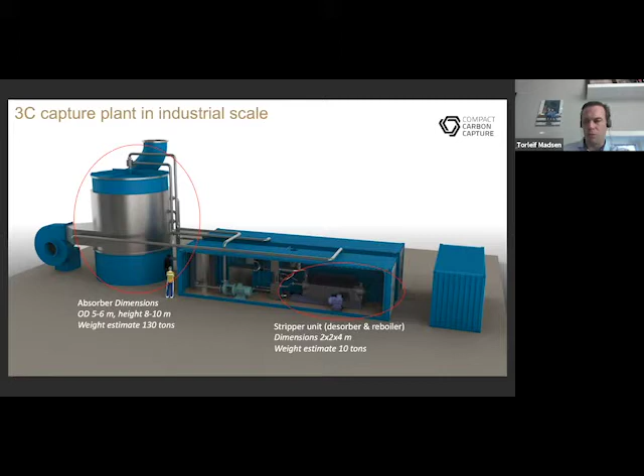The loaded solvent is taken into the stripping unit where it's heated up and releases the CO2. So you can deliver the CO2 at an overpressure of about 4 bar, which will be energy saving in the liquefaction.

We are standardizing this in modules. So instead of tailor-making CO2 capture plants for each point of emission, we are standardizing in strategic sizes, and then we are scaling by modules. We could have as little as 10,000 tons per year, which would be suitable for very small emissions and preferably utilization cases for the CO2, up to medium points of emission in the roundabouts of 1 million tons per year, which would be huge waste energy plants or large industrial sites.

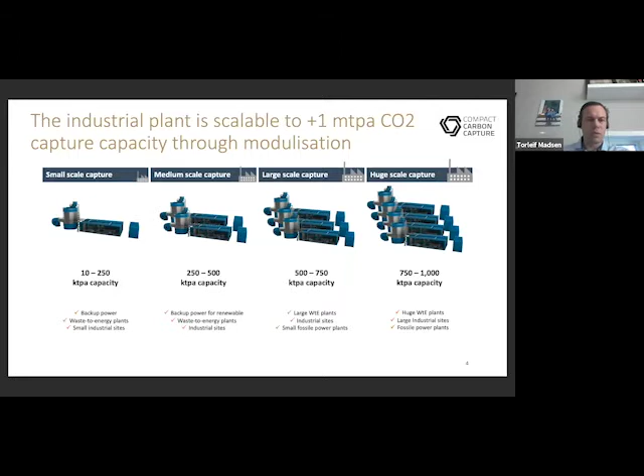So our key feature is of course the size. With a 90% reduction on the core components, we find that we could reduce the size of the plant by up to 75%. This allows us to use a lot less building materials to build these plants, and that has a direct effect on the capex. So we're aiming for a 50% capex reduction, which will of course be case specific.

By adding this module-based scalability to the equation, we find several benefits. One is that you do not have to invest in a full capacity of your production right away, but you could deploy one module and then build up a price premium for emission-free products, and then add on modules as the market moves in the right direction in terms of payability for CO2-free products.

In terms of OPEX, the process technology itself is quite equal to conventional technology, but because of the high G forces we are using to distribute the solvents, we could utilize a lot more viscous solvents, giving us the opportunity to have more efficient solvents and a much higher degree of freedom on which solvent to choose. So we could use the optimal solvent for each point of emission.

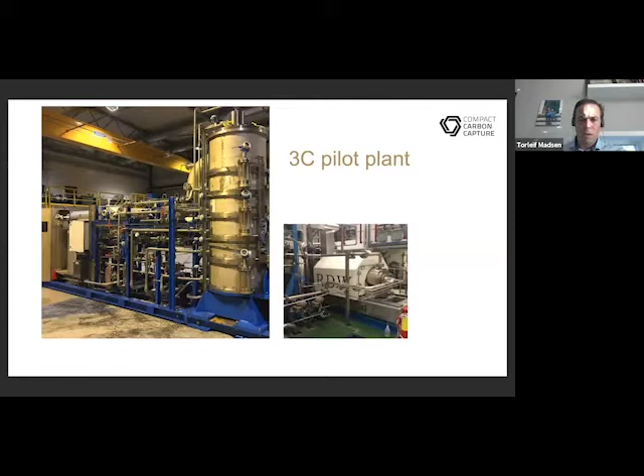If you swap the slide again, I think that would be conclusive for my presentation, and I would be glad to answer a few questions at the end if the time allows for it.

Okay, I don't think we've got any questions coming in. A question from me would be, what type of customer are you looking for this kind of product? Is it the industrial sector? I mean, you've talked about maritime, but is this aimed at the industrial sector?

It's industrial, waste energy, power plants. I think it's a matter of where we find it competitive. And if we look at 5 million tons or 10 million tons coal-fired power plants, I think the capex issue would be less significant in the overall cost perspective. But everything in between 10 and 700,000 tons per year in emission, I think we find the sweet spot. So the competitiveness of our technology would increase as the need for footprint is higher. So if you have a lack of space to put your plant, I think we would have a large favor.

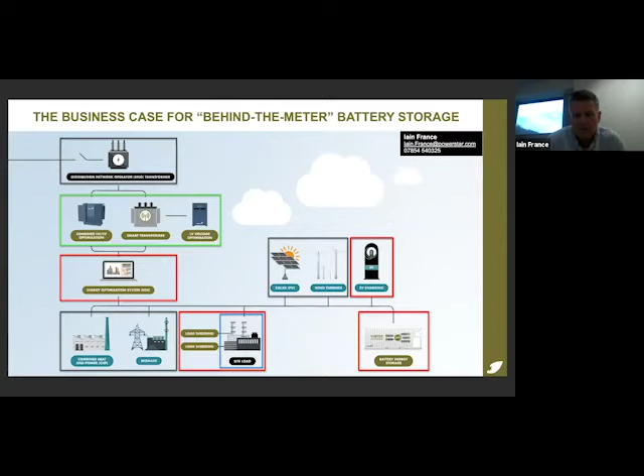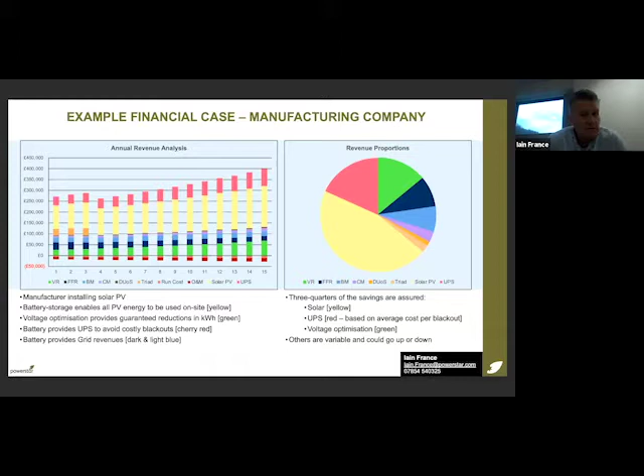I think I just did that in 20 seconds under my 7 minutes. How's that, Scott? There you go.

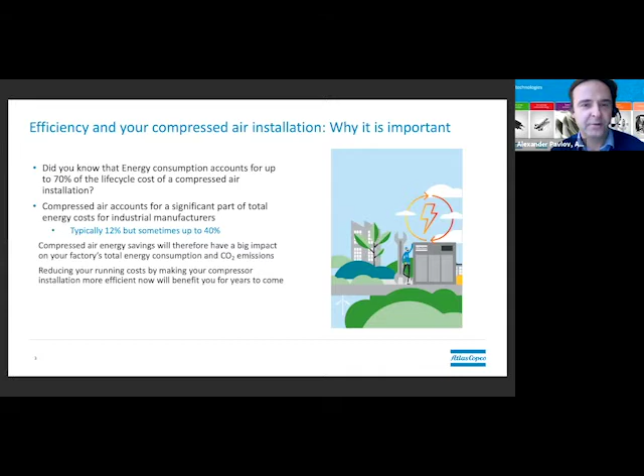What I really want to speak about today is the importance of the energy aspect when we speak about compressed air. Normally it's about 12% of the total industrial consumption for electricity. Compressors are used in all industries, so in any factory you would find a compressed air system, and they are big consumers of energy. So the focus has to be always there.

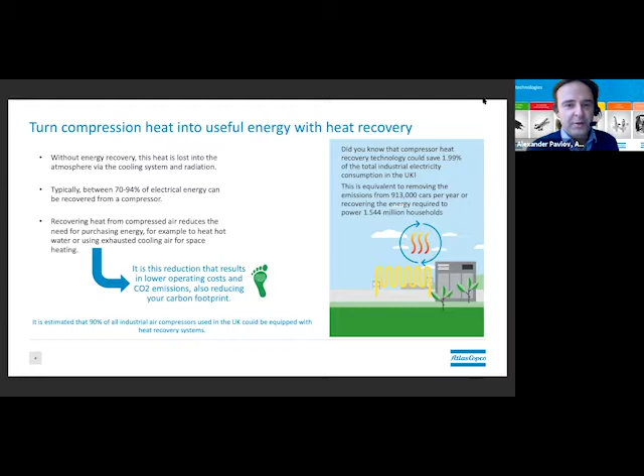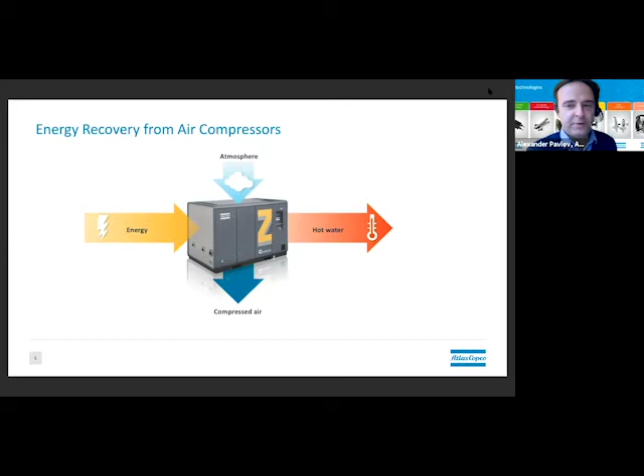Going into the technology, without going into too much detail, a compressor takes atmospheric air at the inlet and compresses the air at the outlet. Most industrial applications would be around 7 to 10 bar pressure. It takes electrical energy at the input, and a lot of heat is released during the compression stage. That heat can be recaptured in the form of hot water, so this energy can be recovered.

There are a lot of points, if we take an oil-free screw air compressor, which typically has 2 compression stages, an oil cooler and intercoolers. There are 5 points where heat can be picked up, and our energy recovery compressors, which have this option included, provide that. For an oil-free compressor, we speak about 90% of the input electrical energy that can be recovered in the form of hot water, and it's a high degree of heat, around 90 degrees Celsius.

So the best application is obviously steam boilers, the makeup water for the steam boilers, and often it's also located very close to each other. Those are just perfect applications. But not only the...

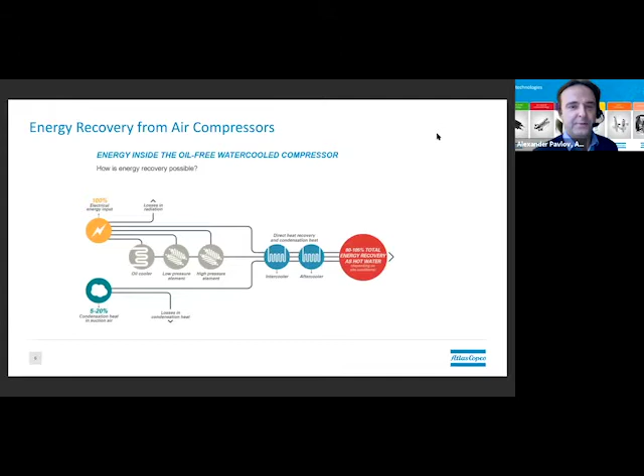oil-free water-cooled compressors. If we go to the next one, yeah, so that's how it works with the water-cooled compressor, which you have on the left side.

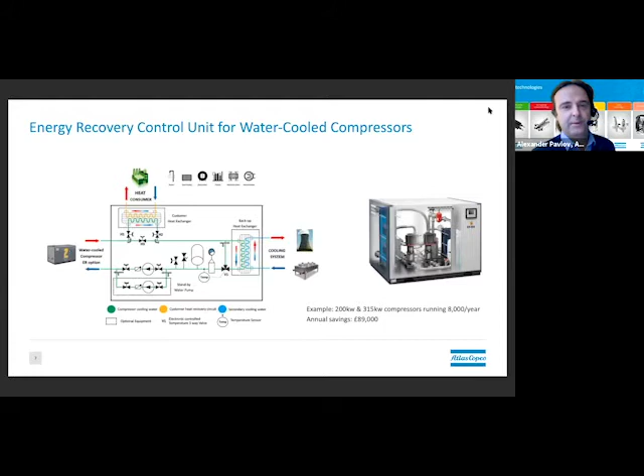We have a big range of standard energy recovery units, which are controlled, because not all the heat would be taken by the consumer, so it makes sure that the water which returns to a compressor is always controlled at a stable temperature, no matter how much heat is taken by a consumer. So we have also those kind of modular systems, products, which are really plug and play, and can be integrated into most existing installations as well.

But also if it's air-cooled, in smaller factories typically it's an oil-injected air-cooled compressor which is used, and there a lot of heat can be recovered from oil, because oil is used as a lubricant and as a cooling media as well.

So there we can connect small energy recovery modules, which are heat exchangers, oil to water, and we can recover all the heat from oil, and then the hot water can be provided to any applications in this case as well. I also put some example numbers there.

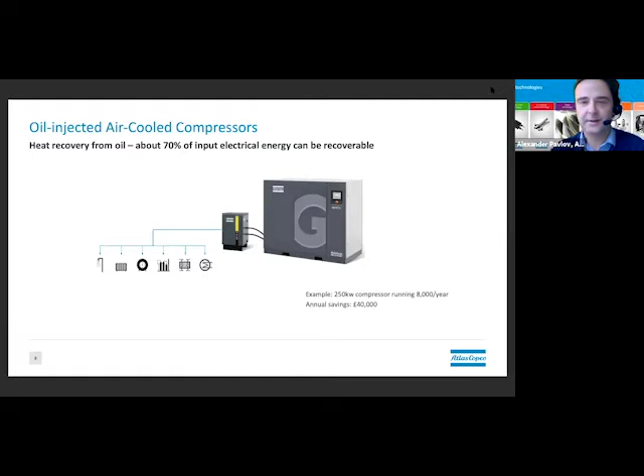We can translate it also in monetary terms, and it's just astonishing how much energy can be recovered. Another thing we are introducing this year is also a very compact and modular screw expander.

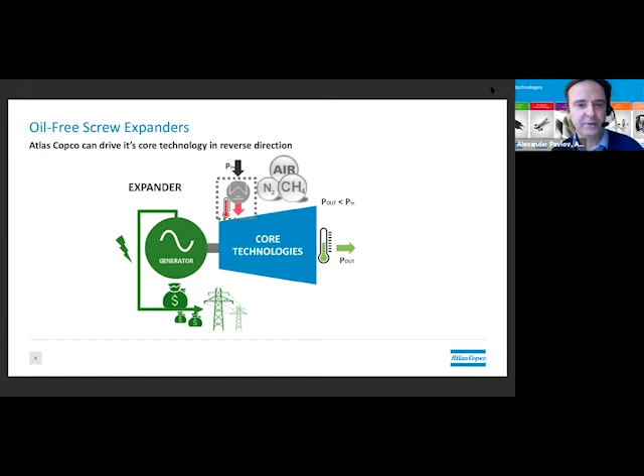Our core technology, which is screw elements for compression, can also rotate in another direction. So we just launched this year a number of expanders, very compact units, for anywhere where incoming pressure would be higher than the outgoing. For example, it can work with a natural gas system. If you get gas on a pipeline and you need to reduce the pressure for your factory, that would be a perfect application. Then through this expansion, we can turn a generator and generate electricity out of that.

So it can work with steam, it can work with natural gas and nitrogen, so many other examples as well.

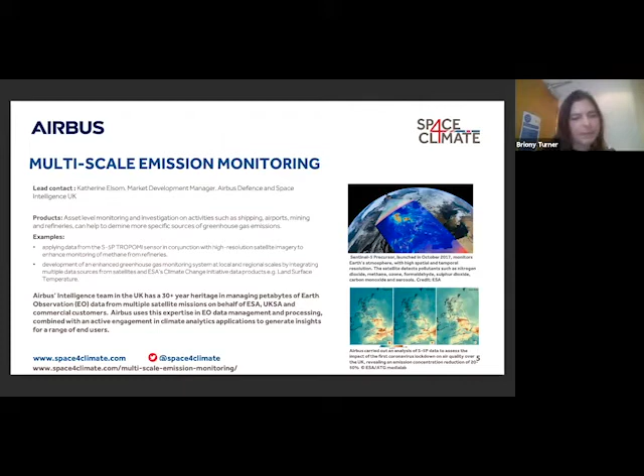Next up, I've got an example giving you a taster of a satellite mission that's coming, which will be bringing new kind of carbon dioxide data. But there still is existing data sets out there, including carbon dioxide but also other greenhouse gas emissions. So an example here from Airbus - they have over 3 decades of experience in asset level monitoring, and we have in our group the intelligence bit of Airbus that works with the climate satellite data aspect.

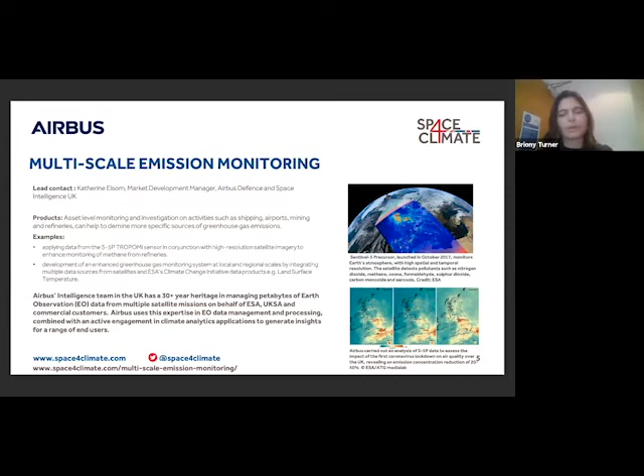So combine the asset level monitoring that they're very good at, processing big petabytes of data, with climate data. I didn't have a carbon emissions example to give you here, but I've got the example from Sentinel-5P, where they very quickly turned around the nitrogen dioxide emissions to look at the impact of the lockdown on the UK. The point being with this image is that, yes, you can look at asset level monitoring, but also you can task and look at political boundaries as well. Next slide, please.

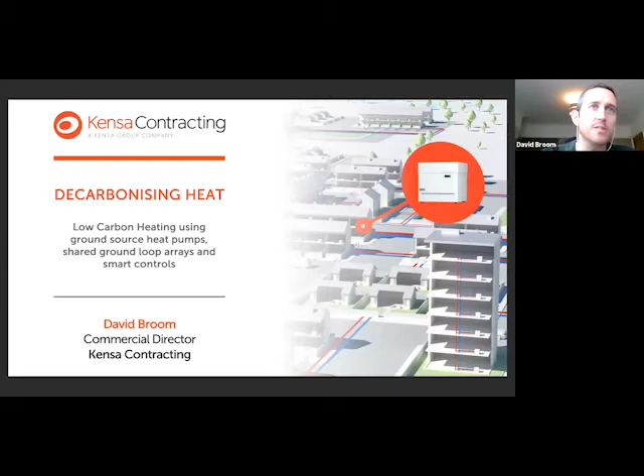Just very briefly, to touch on ground source heat pumps and how they work: essentially what we do is take a large volume of low grade heat, harness that heat, compress it and upgrade it into useful heat for homes and businesses. The key element is that the closer the temperatures are between where we take the energy from and where we're putting it into, the less work the compressor has to do, and the more efficient the system will operate.

Heat pumps seem to be coming towards the forefront of people's minds. We have to spend a lot less time explaining the technology now, which is great. What we have is a slightly different application for the technology than your standard kind of domestic individual installations.

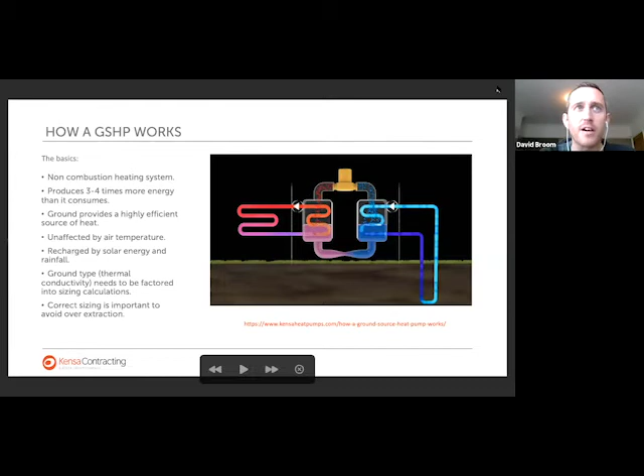So next slide please. What Kensa have been pioneering over the last 7 or 8 years is what's become known as 5th generation district heating, or ambient loop district heating. The heating sector was referred to as the elephant in the room earlier, so hopefully we can start answering some of those questions as to how we deliver on these challenges.

What we do is take traditional heating and flip it on its head a little bit. We use the low temperature circuit that connects all of the heat pumps together to distribute energy around the circuit, and then we upgrade the heat to useful heat at the point of use.

Typically this is within individual buildings, and we've done lots of social housing retrofit, including tower blocks, where we've taken out mains gas combi boilers and replaced them with ground source heat pumps, individual units within each dwelling providing space heating and domestic hot water. This improves compliance but also provides a solution that doesn't impact on fuel poverty, because we're not increasing the running cost to residents compared to mains gas.

The benefit of doing it that way, rather than a central plant, is that all of the network is on the cold side rather than the hot side of the heat pump. So we design out any system distribution losses around the circuit.

It also means that all of the billing is individual to each end user, so the heat pump is downstream of the end user's electric meter. They just pay for their heat as part of their electric bill, and they can do away with their gas standing charge, so that makes another saving.

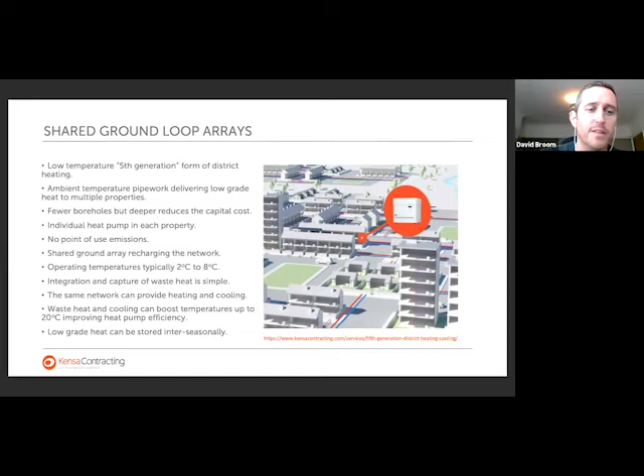That network typically operates anywhere from 2 to 8 degrees, but can operate up to 20 degrees, connecting all of those heat pumps together if we've got some waste heat on the circuit. The heat can be developed through closed loop boreholes, drilling down a couple of hundred meters to take energy out of the ground. We can use groundwater, so energy available in aquifers, and we can also use surface water as well. There's lots of residual energy available in the ground around us.

But what we can also do is harness lots of forms of waste heat. Because we've got that circuit running at ambient temperature, it can equally be used for space cooling and process cooling as well as heating. So I was very interested to see Brian's mention of water-cooled data centers earlier — we could harness all of that energy, put it into our ambient loop network, and distribute it amongst all of the heat pumps on the circuit to deliver space heating and hot water. This also allows us to have heat pumps sized and specified to each individual load at any point on the circuit.

So again, if you've got more industrial or commercial applications, larger and high temperature heat pumps can be used to service that. And then low temperature heat pumps providing small scale heating and domestic hot water for dwellings can also be used. That ambient loop circuit then becomes a heating and cooling loop that can be used anywhere amongst the circuit to generate heating and cooling, and process cooling can also be used. Energy from waste, connections to any other form of waste heat can come in, and that also assists with the business model in terms of reducing costs for cooling as well as heating.

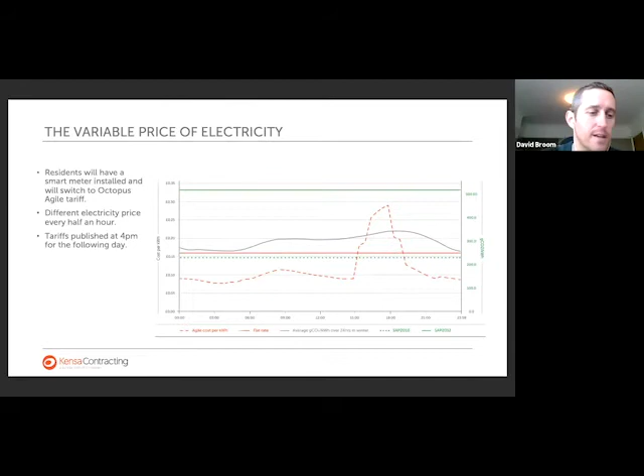So if we go on to the next slide, please. Just by moving 4 half-hourly slots of the heat pump operation into lower peak, lower cost operating times, we can save 15 to 20% of operating costs. All that means is we bring the heat pumps on slightly earlier, heat to a slightly higher temperature, then turn them off again and let the building cool itself down when electricity becomes more expensive. We see this as being a big part of the future of the rollout of renewable heat in the UK, and that's how we look to combine with other renewable generation and electrical storage.

Next slide, please. As a practical example, we are nearing completion on the first phase of the Oxford Super Hub project, which is the installation of 60 dwellings retrofitted into social housing properties for Stonewater Housing. These all feature individual heat pumps connected to a shared ground loop and all installed with smart controls that allow us to provide that level of home automation and optimization, reducing the running costs of the residents even further by switching the operation of the heat pump into off-peak times. Part of that scheme is also large scale transmission connected battery storage, bringing the whole thing together to ensure that as far as possible, localized energy is used to provide the operation for those heat pumps.

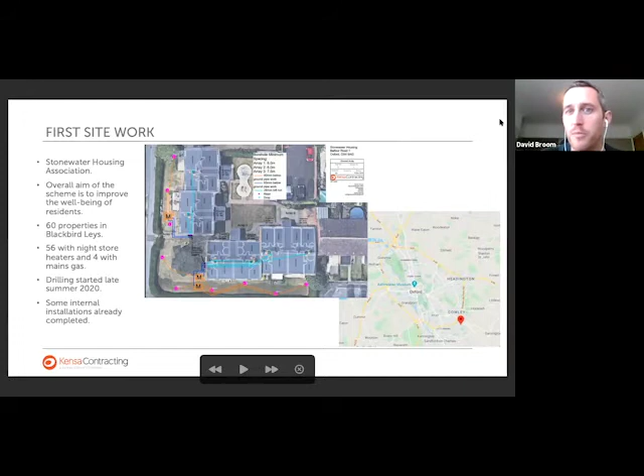So I don't know how I'm doing for time. I fairly well rattled through that and skipped on lots of detail. So if anybody wants to know any more, please ask the questions or get in touch separately. I'd be more than happy to talk through a little more at length and in a little more detail. But yeah, we're certainly confident that ground source heat pumps and ambient temperature district heating has got a big part to play in the decarbonisation of heat in the UK.

Thank you, David. Absolutely agree with you. I think heat pumps are going to play a massive part in heat decarbonisation. So thank you very much for giving your pitch. Any questions for David, please pop them on the Q&A, and David, if you could answer those so that we can all see. Hi, Lydia. Hello, Scott. Hi. How are you? Great pleasure to be here. Excellent, over to you, you have 7 minutes. Go for it. Thank you.

So I would like to start my presentation to show you a building that displays a 62-foot wide 15-digit electronic clock. And you can pass to the next slide, please. This clock is very important because it displays a deadline for us to take decisive actions to keep global warming under 1.5 degrees, compared to pre-industrial levels. This clock shows we only have 7 years left to deplete the 420 gigatons of CO2 budget to burn. So no need to say how much this brings the future into focus, and time really urges for us to find a realistic solution to turn this out.

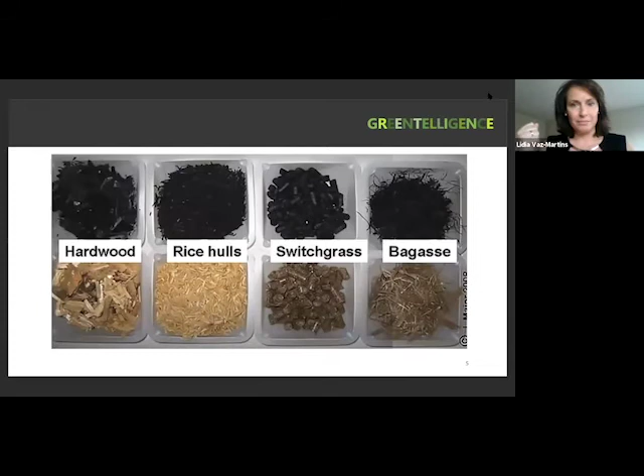This biochar is basically made from any type of biomass. When you heat this biomass in an oxygen starvation environment, you thermally decompose it into three things: combustible gases, tar and oils, and the solid compound we call biochar. This process is known as pyrolysis.

When you take a look under a microscope at this compound, you can see it's full of channels and has a lot of open area, which gives it two fundamental properties: it's highly porous and has a huge surface area. This surface area is weakly negative, which is great for drawing minerals into it. This is the material used for centuries and millennia to amend soils.

Making biochar is not a new technology. It's the oldest industrial art we can think of, and pyrolyzing organic debris to make gases is not new either. What is new is that we can use this substance, apart from soil amendment, to combat climate change. And how does that happen? A little biology will explain.

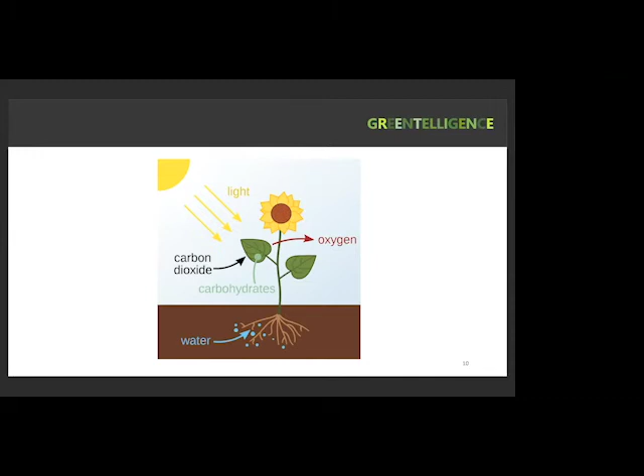So apart from having great benefits to the soil, we can trap carbon dioxide from the atmosphere. By producing biochar massively at a large scale, we are able to offset 12% of human greenhouse gas production.

And here is where biochar is different. Because in addition to avoiding emissions, biochar sequesters carbon in the soil, removing it from the atmosphere and working as a long-lasting and stable sink.

We call this carbon negative, and being carbon negative is planet positive. This technology positively impacts 11 out of 17 sustainable development goals set up by the United Nations, revealing that biochar is a really powerful tool for a variety of environmental challenges we face today.

We all know that our economy is totally dependent on petrochemicals, and we are all paying the price with eroded soils, polluted waterways, oceanic dead zones, and other externalities that pile onto the global threat to sustainable development goals. But soil holds the key.

My name's Geoff Edwards, I work for Axair Fans as the Business Development Director. I'm going to talk to you today about AHU refurbishment, specifically using EC fan grids.

The core of the EC fan grid is the EC motor. The EC motor is a combination of a DC motor and an AC motor. And what you get with that is the energy efficiency and controllability of the DC motor with the relative ease and flexibility of the readily available and well-distributed AC power.

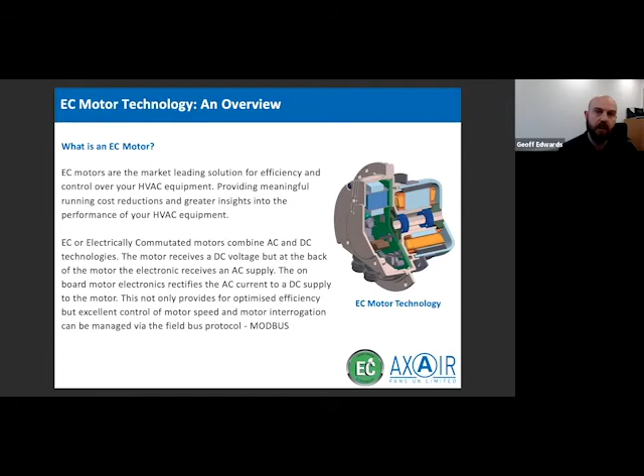The primary two advantages of the EC motor are the energy efficiencies you get and the controllability you can have over the motor. That provides really meaningful running cost reductions, both from an energy consumption point of view and a maintenance point of view. And with the onboard connectivity, the interrogation of the motor gives you greater insights into the performance of your HVAC capital equipment.

The EC fan grid itself is the addition of the EC motor to an impeller that will move the air, and then using multiples of these. So it is in effect a fan grid, a fan array.

There are lots of good key benefits to that, but for the sake of being quick, I've listed just the top three. Now the flexibility of the solution is really one of the nice things about it. You can have almost any combination of internal configuration of an AHU combined with really any size of performance, airflow and pressure loss systems.

Because of the array or modular nature of the fan grid, there is an inherent inbuilt redundancy, which allows for single or even multiple fan failures, but the solution as a whole is still providing a minimum airflow, or even 100% of the requirement at the initial design stage.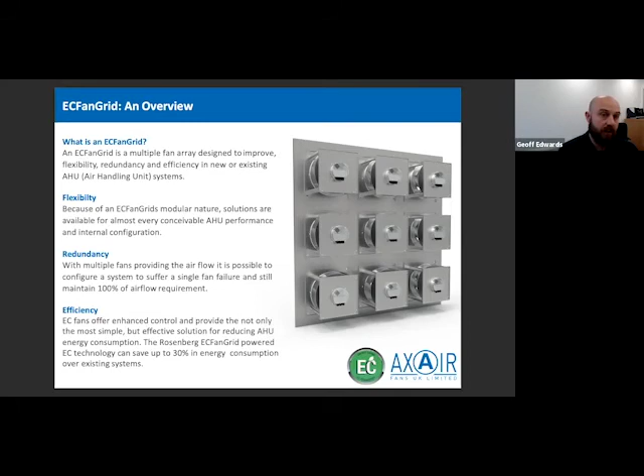The efficiency, with the enhanced control using EC motors, the system can save up to 30%. Occasionally it can be more, and that is very meaningful. At 30% savings, you can comfortably get ROIs of down to about 1.5 years, 2 years, 3 years is typical. Here we have a small application case study.

This was actually in Germany at a banknote printing site. The image on the left is the original fan that was installed, and it was replaced with the fan grid that you can see on the right. The original 2 fans were consuming over 67 kilowatts per hour, and the replacement fan grids reduced that consumption down to 46 kilowatt hours. You can see there that the CO2 reductions dropped by 100 tons a year, and the payback period was only 18 months.

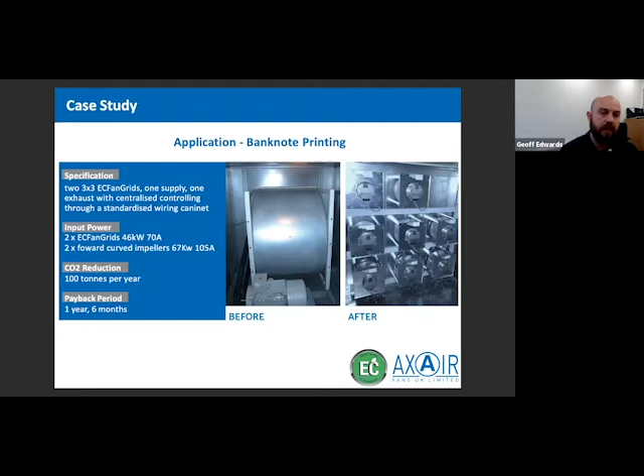So what does a project delivery look like from Axair? There would be an initial site assessment. Probably that would be a desktop study by myself from my office in conjunction with the customer side, trying to understand what they want to achieve from their project and their performance parameters.

That would likely lead to an on-site survey, and that can depend on what is wanted to be achieved. That could just be simply assessing the site, the premises itself, the internal measurements of the AHU, site access, and so on. If a more in-depth understanding of the savings, carbon emission reductions, and electrical consumption savings is wanted, then we can do a full validation survey, so the whole parameter of the AHU is defined.

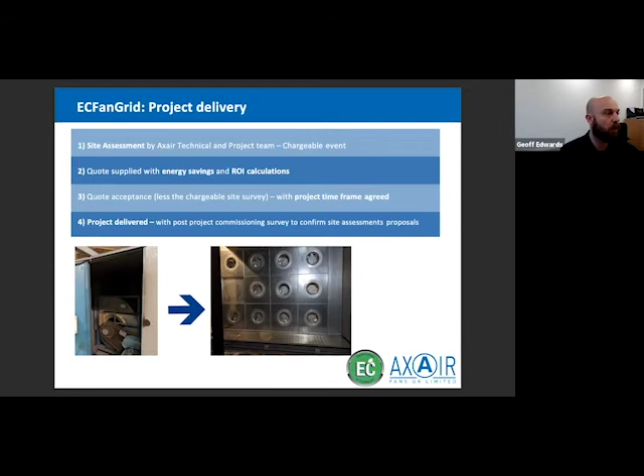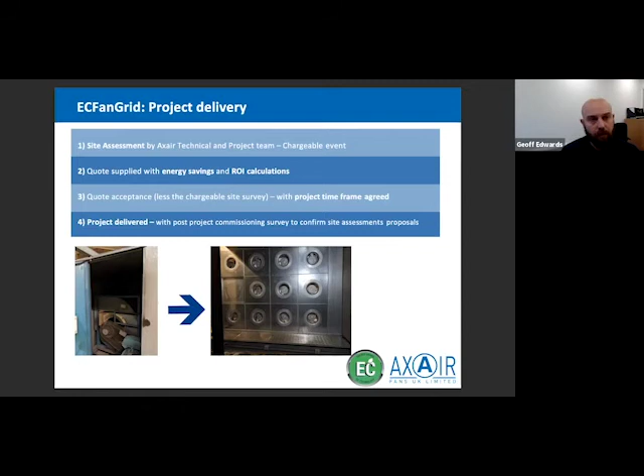Following those site surveys, a quote is provided, and there's a back and forth about the different options. There are almost always 2 or 3 different ways of going about delivering the project. If the project was to go ahead, any site surveys that have been charged are deducted from the value of the quote, and then we go forward into delivering the project.

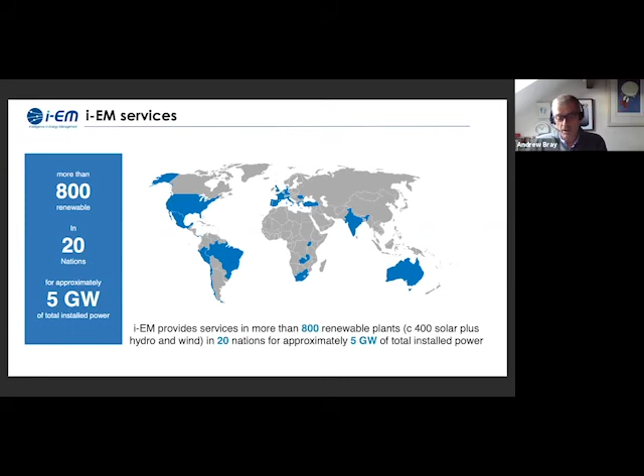I work for i-EM. We've been going for around 15 years. We provide software for renewable services and renewable products on a worldwide basis. We get data from satellites, from drones, from data loggers, from technical specs, and one of the key skills is blending all the data in. So we provide services across the world, in PV, wind, storage, microgrids, and starting to look into e-mobility. So the talk today will be around predictive maintenance.

So on a recent webinar I attended, somebody mentioned a figure of about $500 billion will be needed just for some major countries' investment in wind and PV to hit the world targets. I think if you add in the figures for battery storage, EV, and all the other investments into renewable, that figure will undoubtedly be higher than that.

So what are people going to need to want to do with their assets? Undoubtedly, the investment in all these assets will need to be optimized. So where does predictive maintenance fit into that?

This is an excellent report from Deloitte. I think I've referenced it on the next slide, as to where the value you can get is by using predictive maintenance. Sorry, if you could just pop back to the next slide.

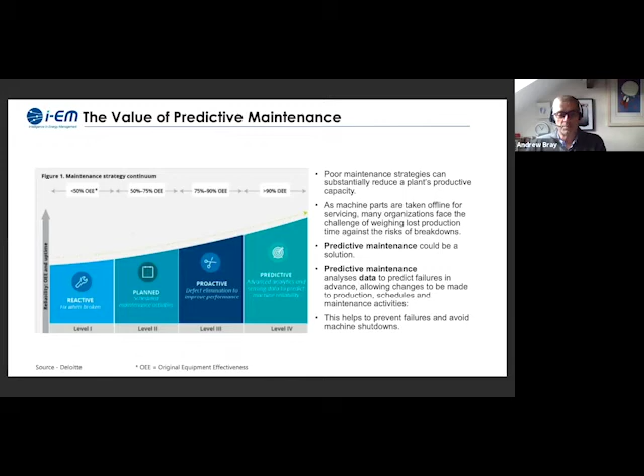So predictive maintenance comes from a number of sources. It comes from technical specs, it comes from previous performance, it comes from analysis of how the plant and the equipment is actually being used. And as people, both end users and organizations, are looking to really use and invest more into renewable energy, we believe that predictive maintenance really has to be part of your program going forward.

Next slide, please. So the Deloitte paper, again, I won't read all of those ones out, but you can see the values that predictive maintenance can really drive - the improvements in uptime, in the improvements in performance and output.

And we did a recent webinar where, from talking to our customers, by adding in predictive maintenance, it increases the return on investment on their PV plants by a minimum of 5%. So if you're investing in PV, if you're looking at other areas, then that really just shows the value that predictive maintenance can bring. So if you go to the next slide, please.

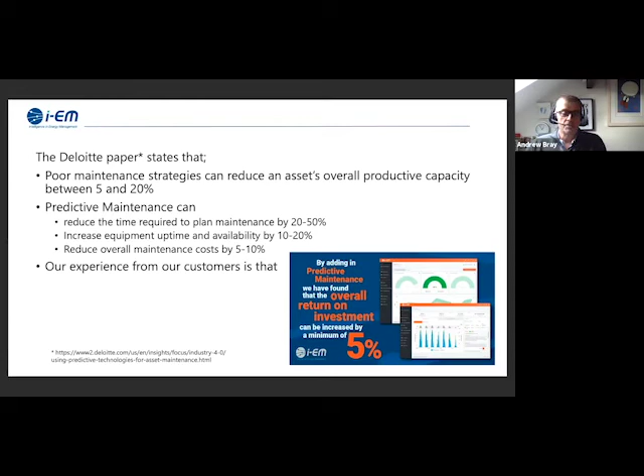So what's our experience in predictive maintenance? We work around PVs, I've mentioned. We do predictive maintenance for hydro. We do predictive maintenance - I'll put my false teeth in - for wind turbines.

And again, by combining and blending a number of data sources for PV, it could be identifying hotspots, inverter issues, etc. We provide a web-based platform for our customers to really have high quality, intelligent data. And we've done a lot of work on the predictive side.

And we found that over 90% of our estimates where there's going to be an issue from predictive maintenance prove to be accurate, which I think if you're providing any type of forecast, that's very, very impressive numbers.

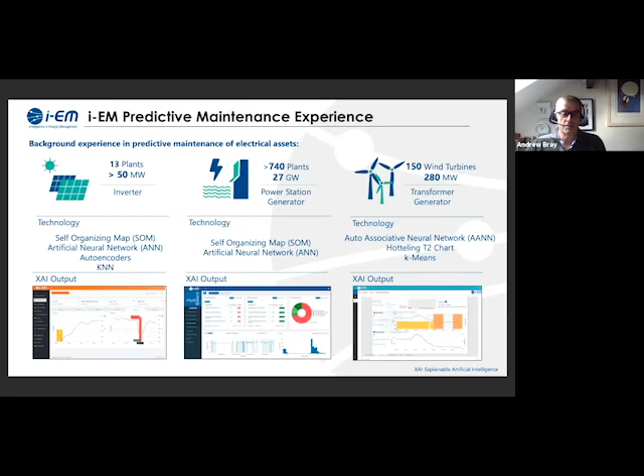Next slide, please. So one of the things that we would like to do - and this is to everybody, and instantly I think the conversations from Brian and Ian around the whole battery space - we're looking to now add predictive maintenance for battery storage.

Battery storage will be huge for microgrids, smart grids. I think the battery EV combination will undoubtedly be growing hugely over the next few period - EV charging plants, etc. So we're looking to try and see, can we add predictive maintenance using our skills and expertise, and to develop that as a service, as an offering.

Next slide, please. So how might this look like? This is a very simple concept. So you have the battery storage maintenance here by adding in a number of sources of data.

It could be the technical specs, weather forecast, and a number of other areas, using the machine models and using the artificial intelligence tools that we have to try and provide a simple output for organizations to identify where there are going to be issues with predictive maintenance.

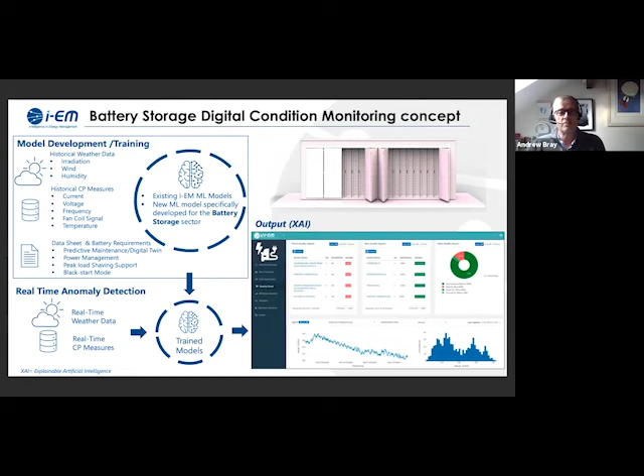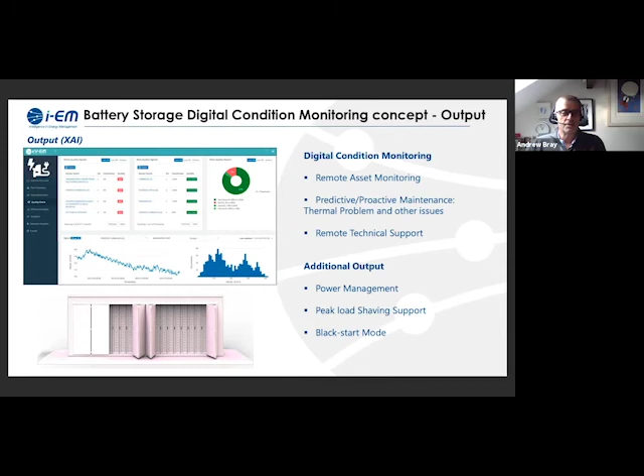Next slide, please. So again, this is a bit more detail to try and identify some issues for customers in terms of monitoring, technical support, and then to help people with power management, black start mode, and peak load shaving. So this is an idea we'd be very keen to talk to people about, and I think it's very quick - I've rushed through mine, so I'm probably slightly ahead of time.

Scott, you'll be pleased. Well done. Thank you very much, Andrew. And it's great to hear somebody else talking about the importance of maintenance and how maintenance impacts on performance. Absolutely fantastic. Thank you very much.

Today I'll talk about how digitization and digital twin technology can be used to help both building owners and engineering companies optimize and improve HVAC performance, lowering carbon emissions as we head towards a net zero carbon future, and also tackling energy cost reduction.

In the interest of time, I think everyone understands the issue of decarbonisation and the role of heat and cooling in buildings, so I won't dwell on that too much. But as we drive towards economic recovery, the energy cost savings from optimising heating and cooling are also significant and important.

This might mean a number of things: moving away from fossil fuels for heating, introducing technologies such as heat pumps, connecting more buildings to heat networks, making more use of waste heat, or just optimizing existing installations, because there's so much inefficiency in most heating and cooling installations.

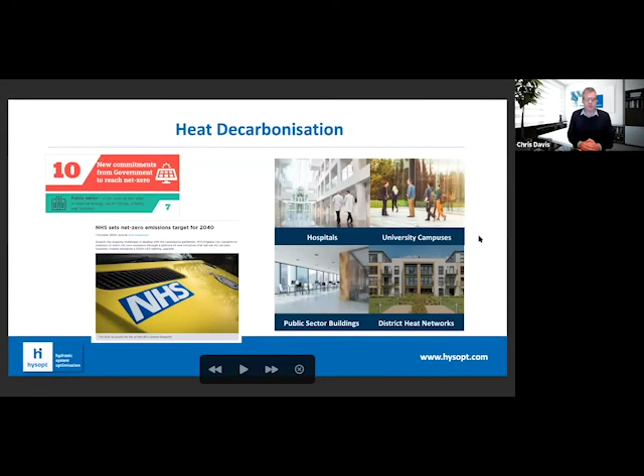The really big challenge is how to do this in both existing buildings as well as new ones. One major challenge is the traditional approach to how heating and cooling systems are designed, which typically ends up efficient on paper and in theory, but rarely in practice. The major reason for this is lack of transparency.

For example, most systems, whether heating or cooling, are designed for a single peak load condition, but without any knowledge of how that system will really behave under part load conditions, where they spend 99% of the year actually operating.

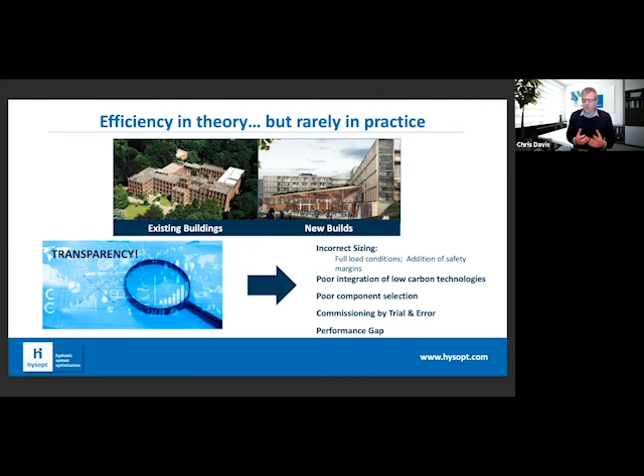We're also seeing designs for low energy, low carbon systems becoming much more complex, with lots of high cost green technologies being introduced—heat pumps, CHPs, thermal storage, heat recovery systems—but there's not enough knowledge and thought given to how the whole system will integrate together and perform in actual use. So the performance of these technologies is not transparent to anybody at the design stage, and no one's taking that holistic approach.

Then we also see a performance gap between design intent and how systems actually perform in real life. All of this means we need this system-based approach. My slide was supposed to build up into a cool little video, but never mind—I'll just talk through it.

This is where digitization technologies really start to help, firstly by introducing measurable performance at the design stage, and secondly by ensuring the integrity of an optimized design is translated into the as-built installation. This is done in two ways.

First, as a design and simulation tool, a digital twin or digital model of the installation can simulate and predict how it will perform under both full and part load conditions in real life. So the design can be optimized to remove any hydraulic inefficiencies and make sure everything is calculated properly.

This allows multiple iterations of a system design to be compared side by side and objectively in terms of energy use, energy costs, carbon emissions, comfort, and so on, so the right commercial and engineering choices are made at the early stages.

Secondly, it's about securing the integrity of the design into the installation and commissioning phases. The idea is that the digital model is transferable at every stage of the process, from design all the way through to installation, commissioning, and handover—giving seamless knowledge of how that installation is supposed to perform, down to how it should be commissioned correctly at that point of a project.

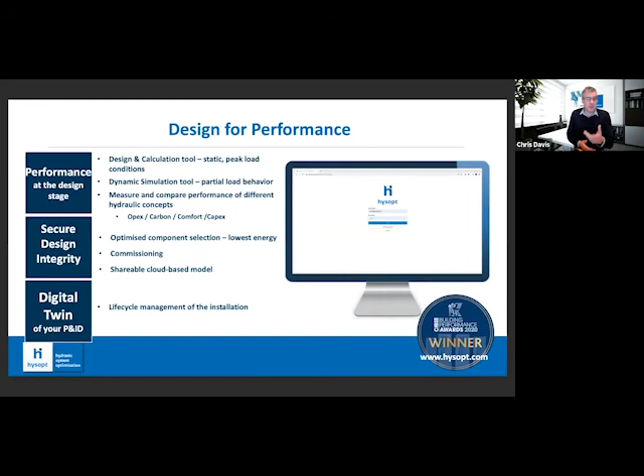What I was going to show you here, the video, isn't working, but essentially what a digital twin looks like is a two-dimensional CAD drawing, with a mathematical model behind it that understands exactly how all of that system operates and works together.

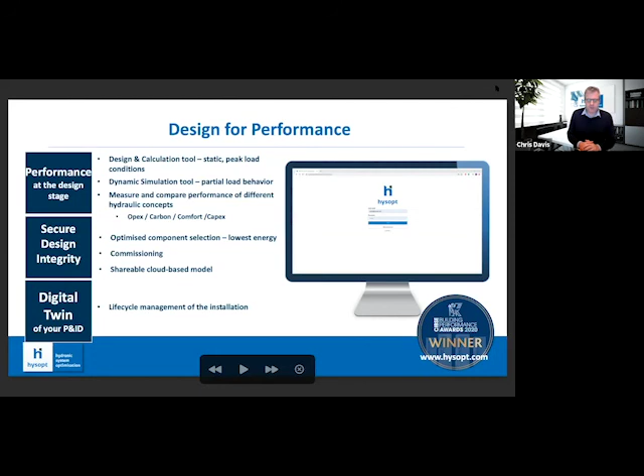And maybe you'll see a still of that in just a second. Then finally, the digital model that's created becomes an asset for the operator. So when the system's handed over, they not only know what that system is, but also how it's supposed to perform. If you can flick on to the next slide, please.

By going through this, it was obvious right away that the design choices that were being made there would limit the optimal performance of the new boilers and the heat pumps.

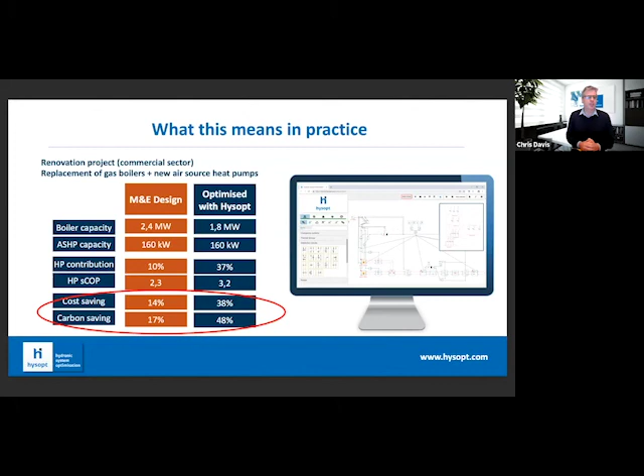Last slide, please, if you can, Chris. There we go. So, in conclusion, the digitization of HVAC systems brings transparency of how systems will perform at the design stage, and helps to ensure that design intent is translated into the actual installation to maximize energy cost savings and carbon savings as we look to move towards non-traditional technologies.